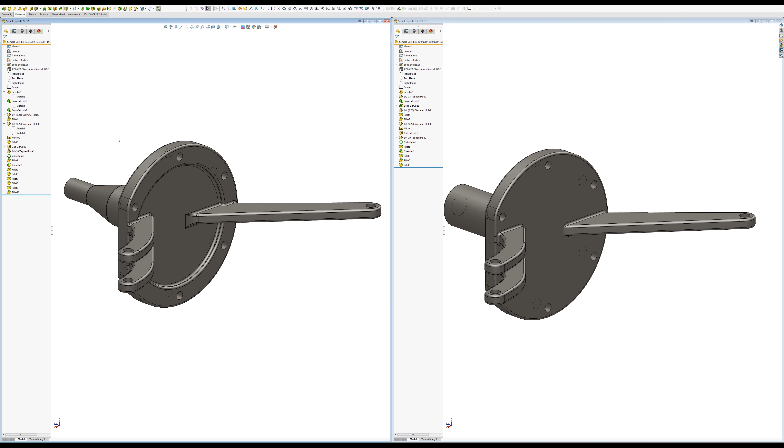So first we're going to look at the part on the left, and you'll notice that the main component of the part is a revolve, and the difference between the two revolves as far as the parts go is that you'll notice that the part on the right does not have this step in it here, and that is the feature that I used to generate the hole.

Now we could go to the part on the right and we could place just a counter bore in it right here. That probably would not be a problem. That would be a very valid way of doing it.

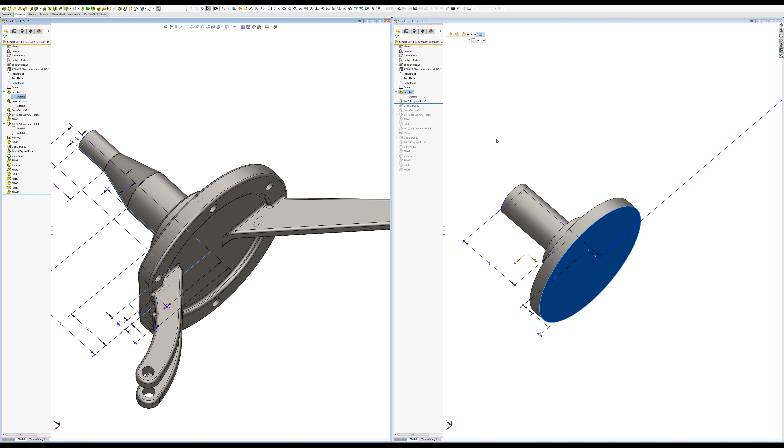I just wanted to be able to control the bore in the initial sketch, the initial revolve, instead of adding another feature. And so if you're a first-time user, you're able to roll the tree back and forth to insert sketches and features in a certain location. But I'm assuming that most of the people watching this video already know how to do that.

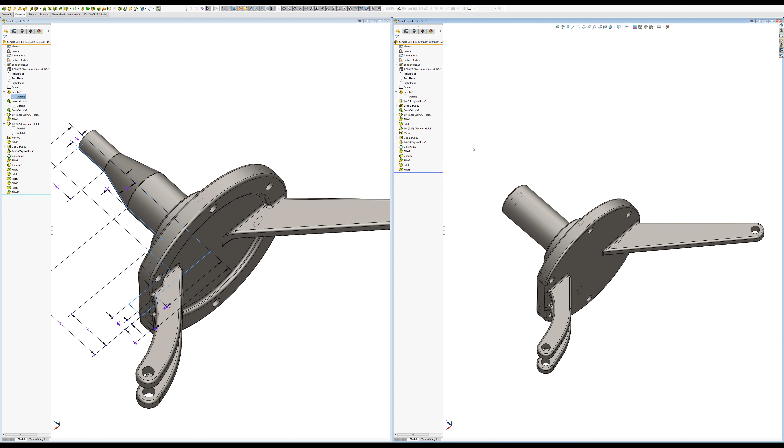We'll go ahead and we'll work towards this part from this part on the right here. We'll work towards the part on the left.

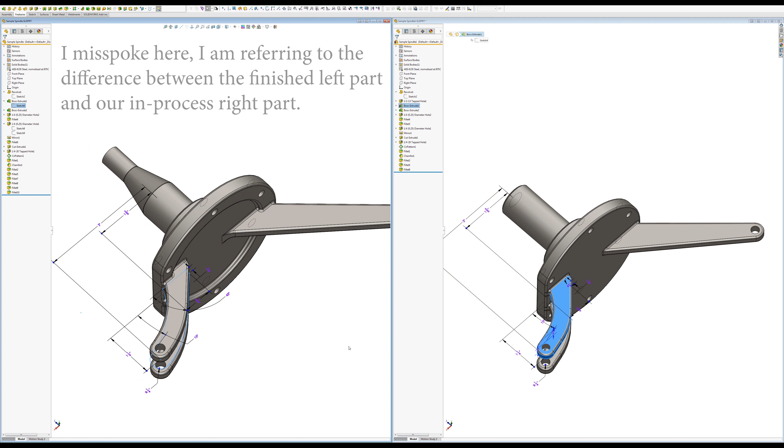So if we look at the boss extrude, you'll notice that the tapped hole is gone on the finished part, or the part we want to go to on the left. If we look at boss extrude 1, they are the same as far as where they're dimensioned from. Nothing's changed. What you would see on the left part from the right part that will make a difference is...

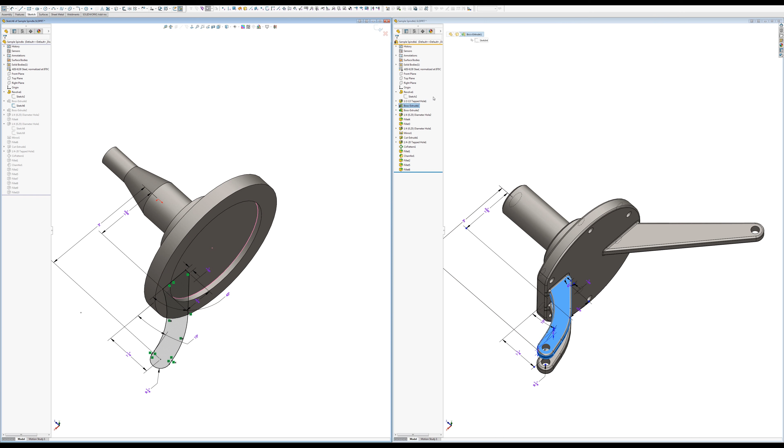If we open it up, this line here is constrained to that inner ring, whereas on this part over here, and this was the original part that we went from, this is constrained to the outer ring.

And so it does change the shape, and so we can talk about design intent. The design intent here is to keep the location from the zero, from the origin to the pivot point the same. And we also have a constraint here of 1 5/8 from the origin to where it comes into the main component. We have a degree constraint here and here both.

And so what we end up doing is we end up flattening this arm out slightly. So if you wanted to keep them the same, you'd have to do something slightly different. You'd have to change, you'd have to extend it, and you'd have to delete some parts.

Let's see, what would you end up doing? This 3/4 inch would no longer be the same because this arc would be extending down. So essentially what we wanted to do was keep the point here where it's going to pivot the same, and we've got constraints that we don't want to violate in this sketch.

Now you may have changed this to 1/4 inch from 1/8. You know, you may have your own set of rules as to what you can and cannot modify in the sketch, but the most important point was this pivot point from XY0. Well, actually, in this case, it would be XZ0, but yeah, it's the origin.

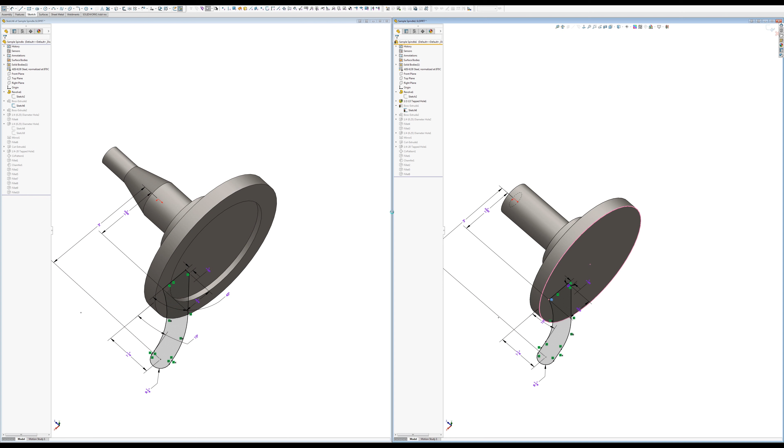So the sketches haven't changed, other than the attachment point, and we'll get to that in a second. And so we're going to get out of these two sketches, and we're going to get out of this one.

And then you'll notice from there's the boss extrude here, same setup where originally it was attaching - if I go to sketch 10 over here, it was attaching on this face, and now it is attaching down inside on the left, down inside the face. So it's going to change this shape a little bit. We're not going to alter where this hole is at, where the pivot point is. That's referenced to the origin.

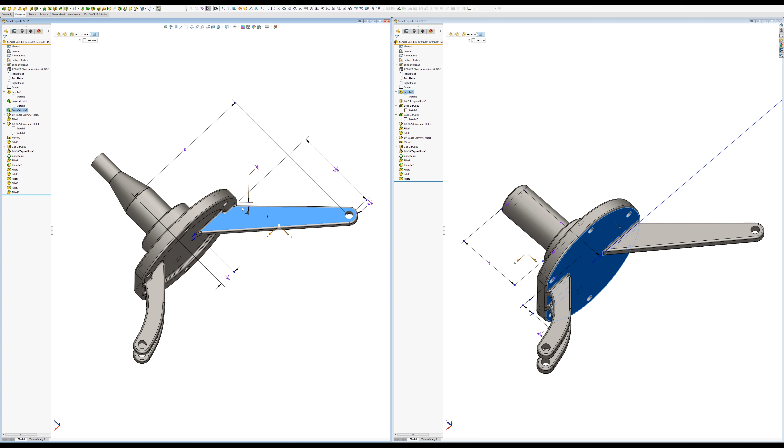And one of the other things we're going to keep is this clearance right here. This 1/8 inch buffer is referenced off the corner, and it just keeps us from flowing out into this edge here.

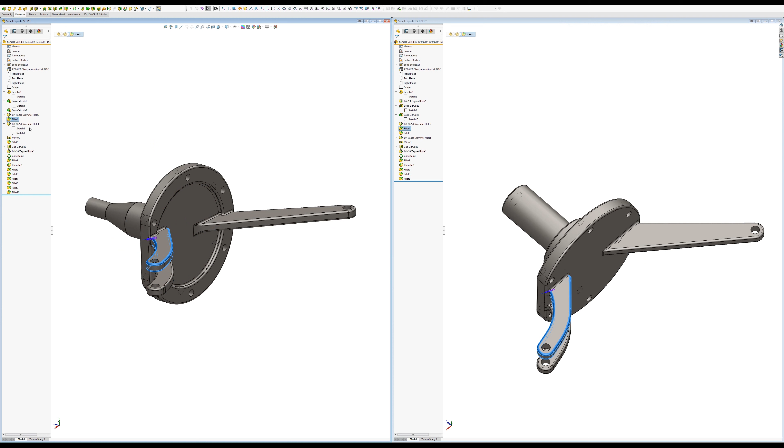Then we'll get to fillet 4, which is the same type of filleting. I did that before the mirror, so I could just mirror the filleting over. Again, that's your choice, you could fillet it after the mirror. I did it beforehand. The 1/4 inch holes are the same on these two parts.

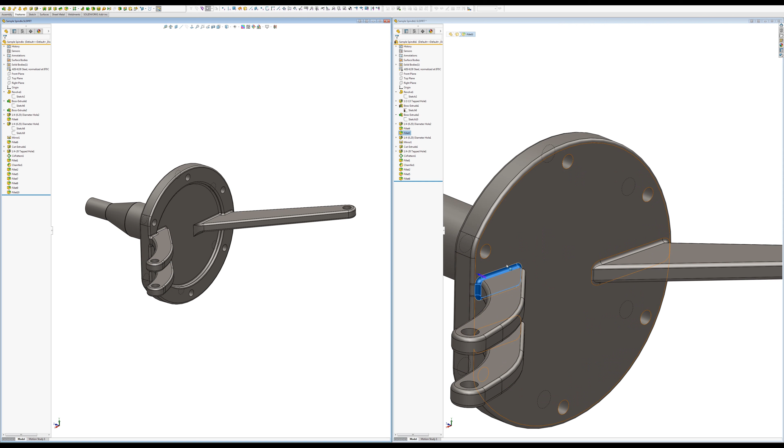Our mirror feature is nearly identical. What we do have here is a fillet 3, so let's discuss that. On this part, fillet 3 runs around the base of that arm, and we eliminated that on the component on the left because it was difficult to get the fillets to flow around the arms correctly with the new features that were added, and we'll go through that. You guys will get to see it during the working process.

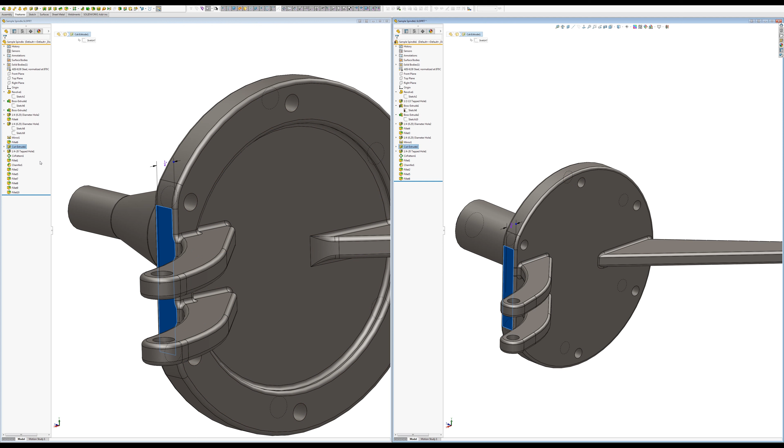The cut extrude is the same, nothing different about that, same distance. The tapped holes are the same. The circular pattern's the same, so we won't touch on those. Fillet 1 is the same, that's not going to change. That's the big fillet here on the front.

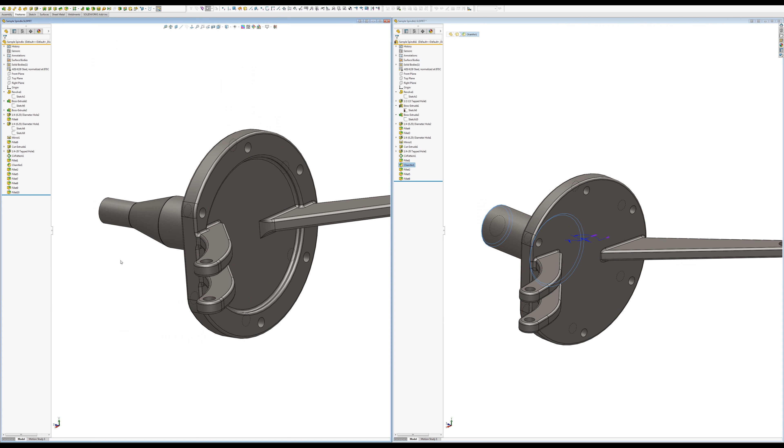The chamfer is slightly different in that the chamfer on the left part is only this front face, where the chamfer on the right part is the two edges. So on the left it's just one edge, on the right it's two edges.

Then we get into some filleting. Fillet 2 is the same thing on both. And then we will go to fillet 5.

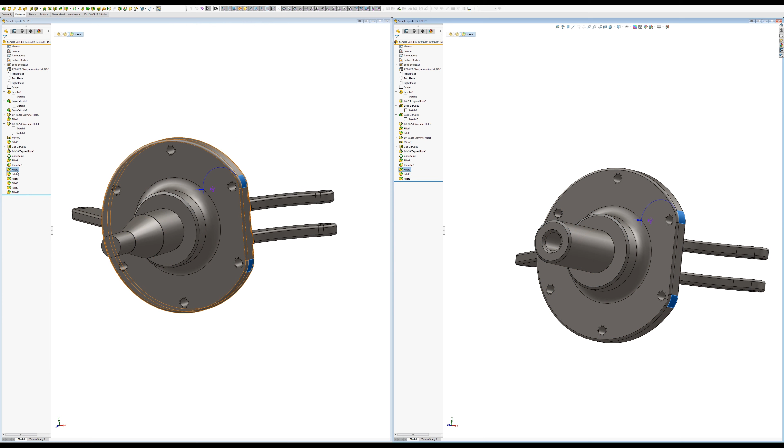You'll see that fillet 5 flows out differently on the two parts. You can see on one part, it's a fairly even fillet around the component. If I was actually doing this part, I would trim this in a way where I would actually clean that up, because a mill would have a hard time doing that. You'd end up with this blemish right there.

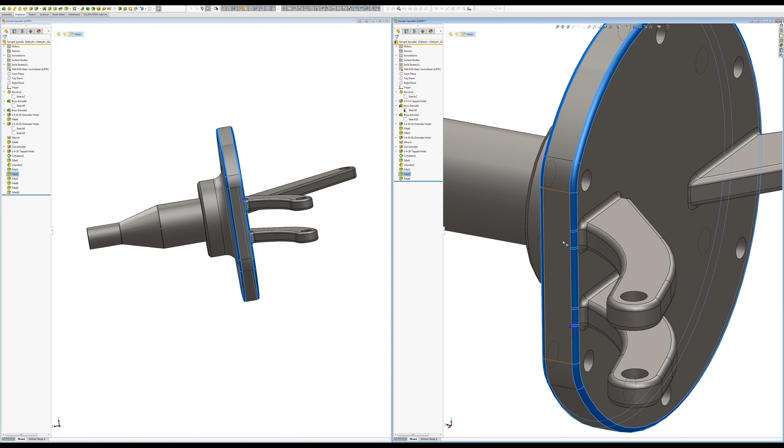We're not going to get into the manufacturing, this is just modifying the parts. We're not going to talk about the manufacturing, but you can see over here on the left part it flows pretty badly. It did affect the filleting because the shape of the arm changed as it was brought into this face here.

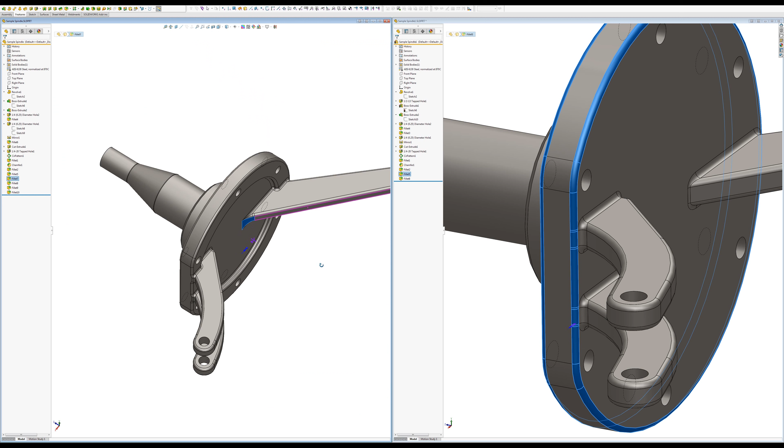So then we've got fillet 7 here, which is this big fillet on this arm. We added a fillet to relieve some of the stress, maybe at that high load point there. And you can see over here that we did not do that on the arm. Let me get this zoomed out a little bit for you guys.

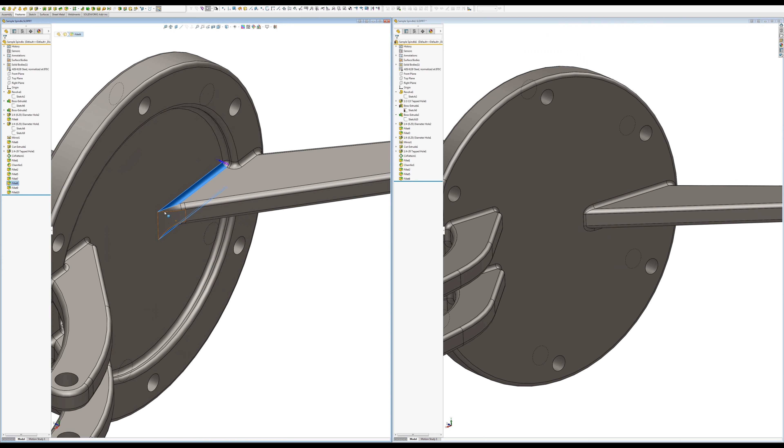So fillet 8. The reason that we did this is, if I would have done it differently, let me see if I can show you guys what happens. We'll get there. Fillet 8 is done just for those two faces. Fillet 9 wraps the rest of the arm. You can see over here that fillet 8 did the whole thing, so we used fillet 8 to flow those fillets around the entire arm.

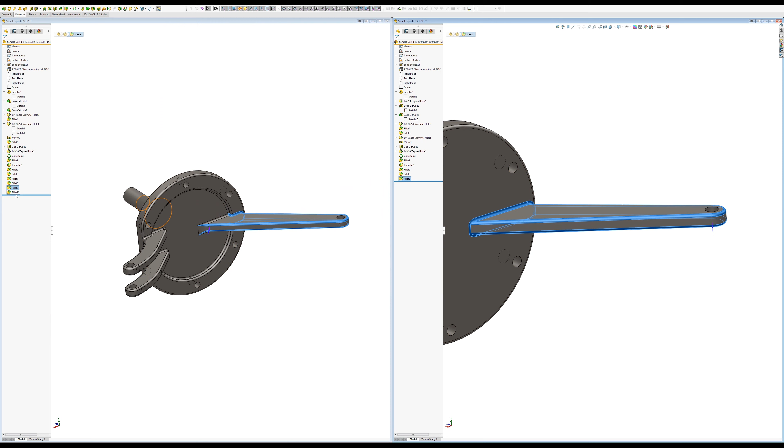And then fillet 10 over here was just to break the sharp edges on the taper and down at the front of the nose cone. So we'll break that edge with like a 0.025 inch. Did that do that, or did it just accept it? No, alright. Might even do smaller than that.

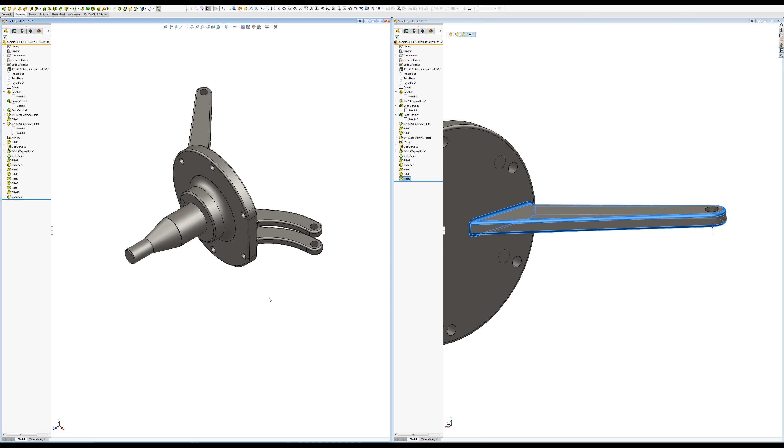So we're going to get into the parts here. What I'm going to do is roll this back to the start of the part, and we're going to go ahead and fix the revolve the way we want it to look. Now, you wouldn't be able to look at your finished part.

In my case, I'm able to look at it. Pretend it's not on the left, so that you would know kind of what you were doing. I know, having done this ahead of time, some of what happened when I was trying to get my fillets correct, and we'll try to go through that again.

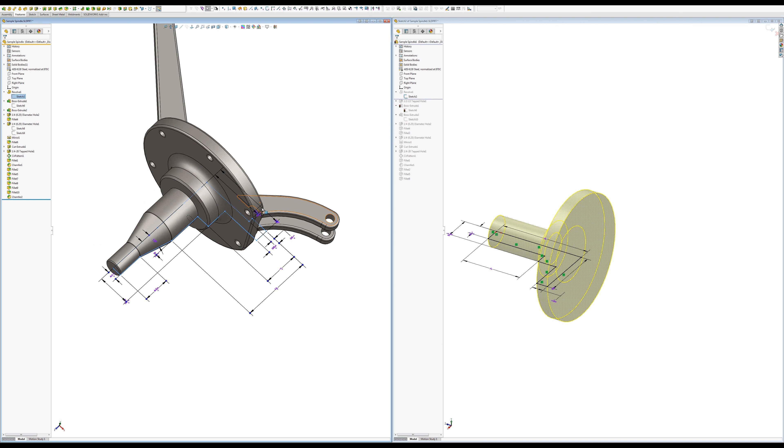So we'll go ahead and get this sketch fixed here. So we'll just add that.

You'll notice that, one of the things, let me go back real quick. Let me undo that. So I'll show you what happens if you dimension. A lot of guys don't realize, if I dimension this line and then trim out, when I trim, it's going to delete that dimension because it was to the end point of the line, point to point.

The reason that my sketch doesn't do that is because when I dimensioned it, if you watch, I dimensioned to the line itself. So when I do a dimension instead of point to point, if you pick the two lines that you're dimensioning, you can do trims, and it will still reference that if there's a piece of the line left. So that's important. We've got 1.5 inch radius by 1/8 inch deep, so we'll get the 1/8 inch.

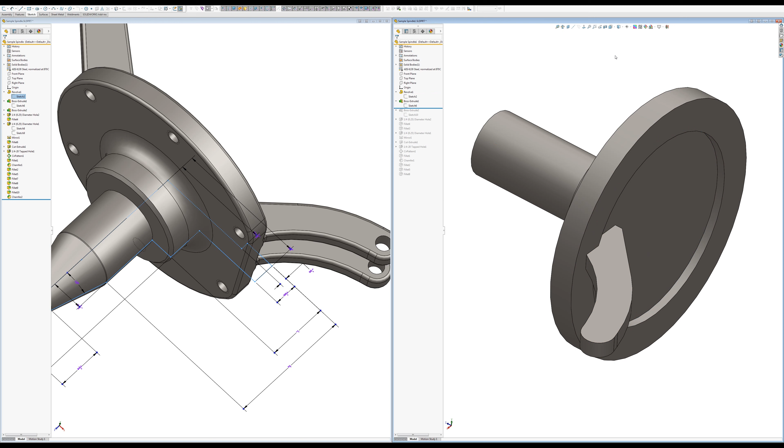We're going to go ahead and set these collinear. You'll see it changes the shape. We still retain all of our intentions with the sketch itself. And now it's down inside the part like it looks over here on the left. Let me roll it back so we can work through it together here.

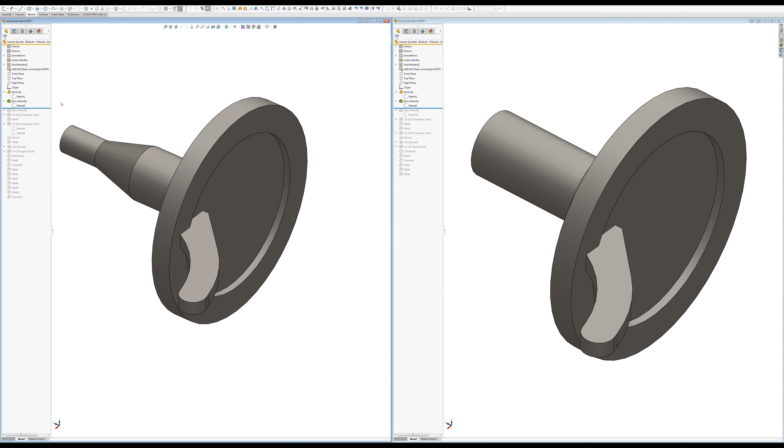If you ever get parts where you have to do this, it's very nice to be able to have the part you want to move it to, or take information off one part and use it on the other. I set them up side by side like this. You can also drag and drop—a whole bunch of stuff you can do.

On the revolve, I forgot to add that front piece, so we're going to go ahead and do that right now, and you'll see some things happen here. So we're just going to add a line here and here and there. Now you're going to notice that when I trim, I lose a dimension.

Because it's constrained to the line. So as soon as I trim out right here, right here—oh, actually I'm just going to lose this. So it's constrained to the line. Going to delete that, and then I'm going to set these two horizontal so they can't move.

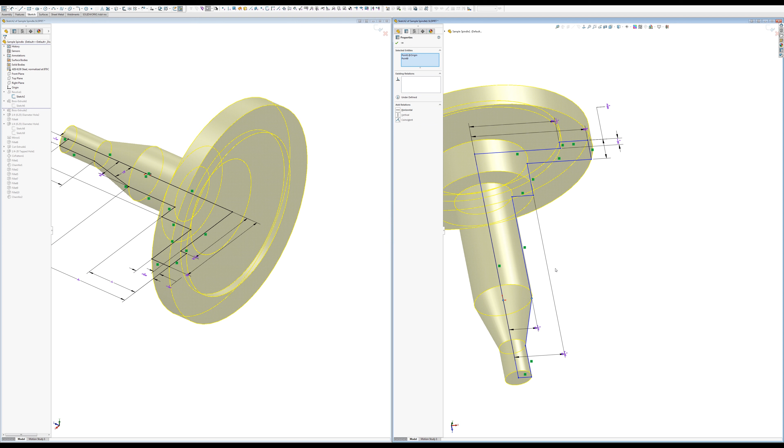Oh shoot. Yeah, I don't know why that moved. So I'm going to set these two horizontal. And then I'm going to go back and dimension from here to here. That's going to be 3.

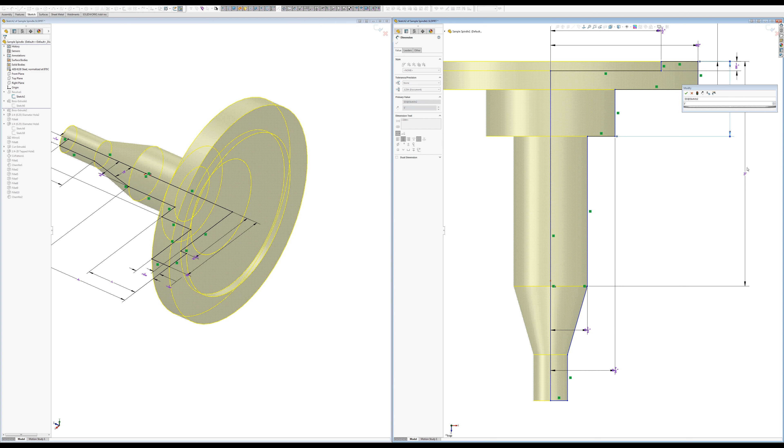And I'm going to change my dimensioning for the shoulder here because I want this distance to stay the same. This I changed to 2 on the other model. So we're going to do that, and it's going to bring the whole thing forward. It's going to keep all this stuff and just shorten this distance here. So we're going to do that.

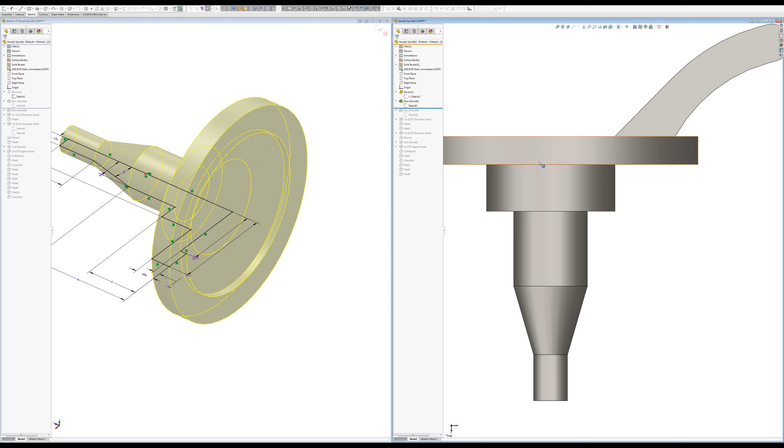And let's see, how are we on time? 16. Okay.

You'll notice that this sketch is on the right, or on the top plane, and I just used offset from sketch—offset, and that just allowed me to move that whole thing up. I offset it a quarter inch. That's something you guys can figure out on your own.

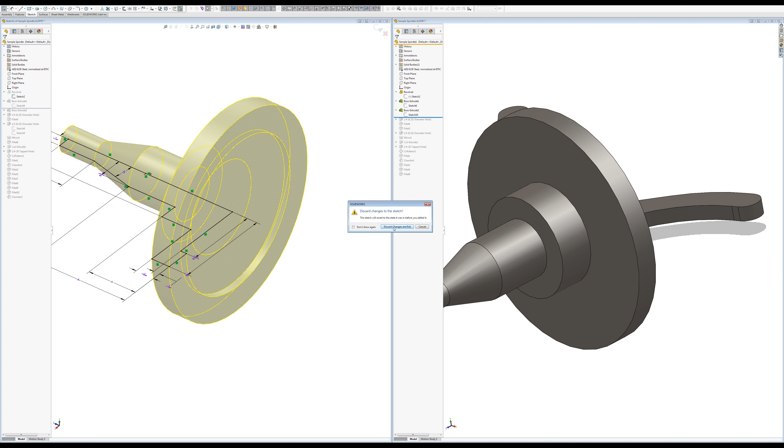So boss extrude 2 is the same. We're going to exit out of here, and we're going to roll down below boss extrude 2. We're going to get our first hole in, which is going to be over there. We're going to get a fillet in here.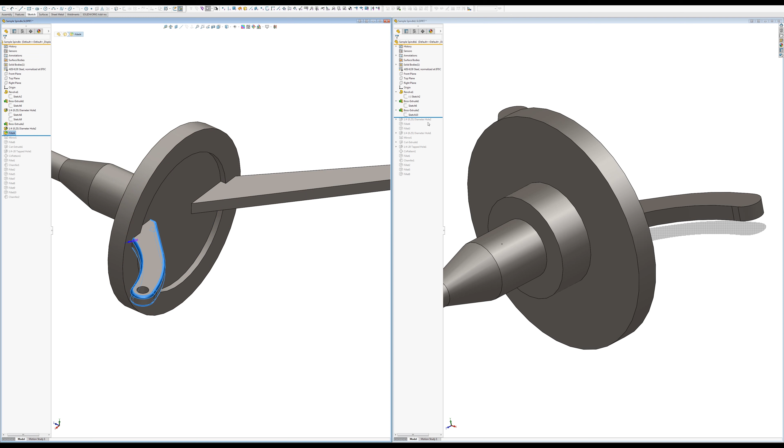So you'll notice fillet 4 does the same thing. I just rolled it around that arm. Fillet 4 here is the same thing, rolled around the arm.

So on the left we're going to leave that, and we're working on the right. So fillet 3 used to go around the bottom, now it's going to go around part of it. We're going to move this like we did on the left side—that was a bad habit on my part.

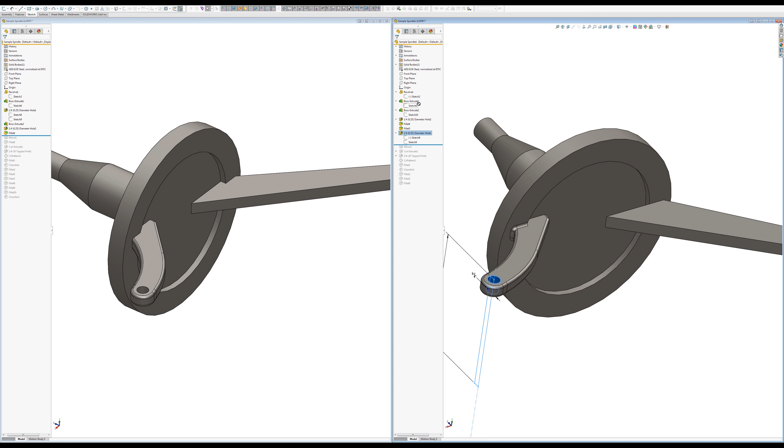We're going to get rid of that. We're going to OK it. We're going to move it up with the part that it goes with. We're going to reconstrain the sketch.

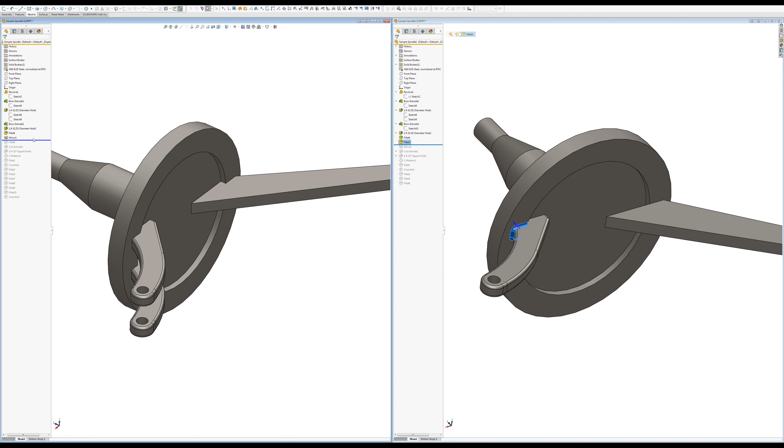And we're going to get back to where we were at. So fillet 3 is not going to work there, and the reason it's not will be evident here in a minute. So we'll roll down and get to where we need to be here. You'll notice cut extrude 1 hasn't changed.

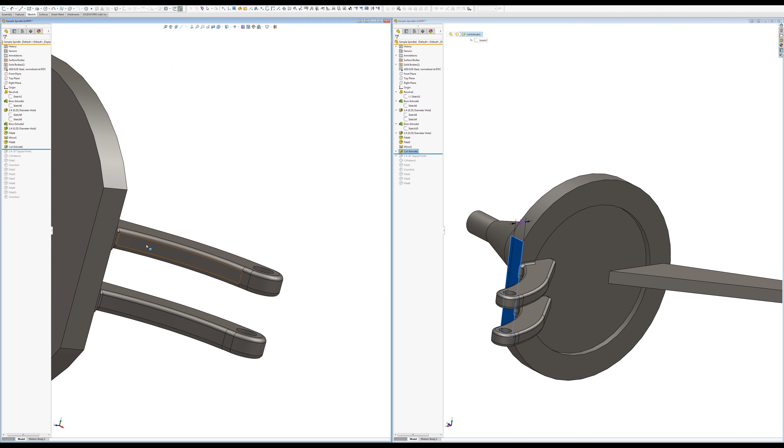What you'll see on the left part here is this fillet sticking out right here, and it shouldn't be doing that. Really what that should have done, that was a mistake on my part. That should go both directions, and this should go up to surface as well.

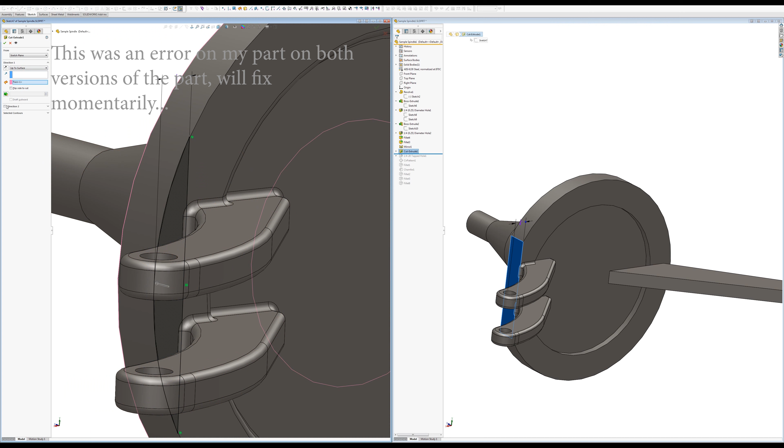Hopefully it'll pick that up, up to surface. It did, good. Okay, and so on this one over here, same problem.

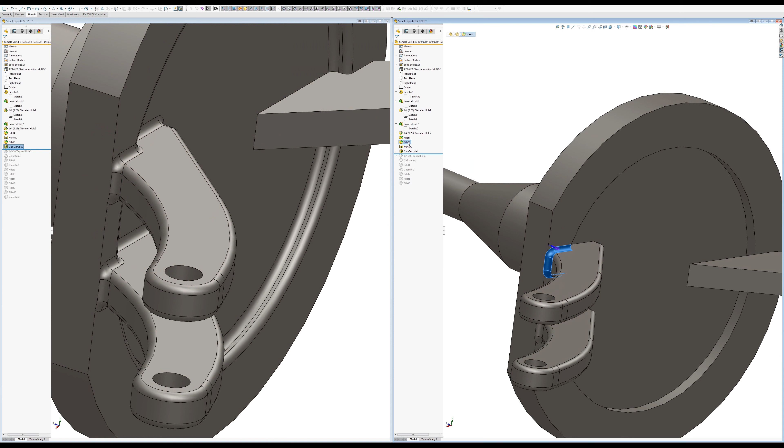We've got fillet 3, which is not doing what it should be doing. You'll notice over here, fillet 6, what I did is I rolled it around everything. So let's take care of this cut extrude first. Oh, we're going to get rid of fillet 3.

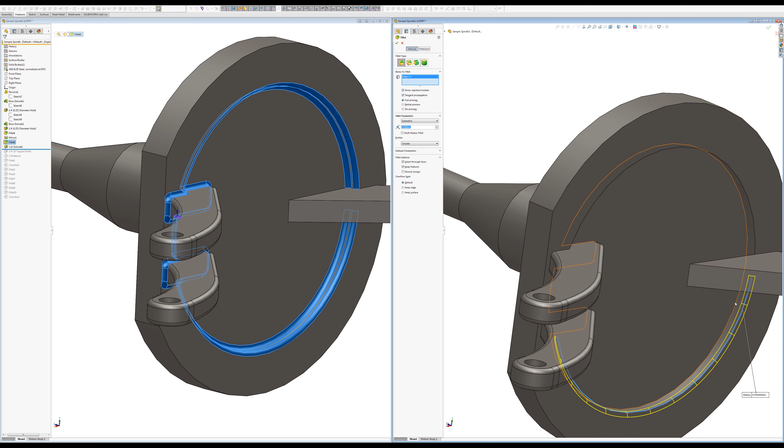And we're going to make a new fillet here, and that's going to be fillet 6. In this case, I'm not sure, it doesn't say what the number is. So we're going to fillet these. We're going to make sure and get these components here.

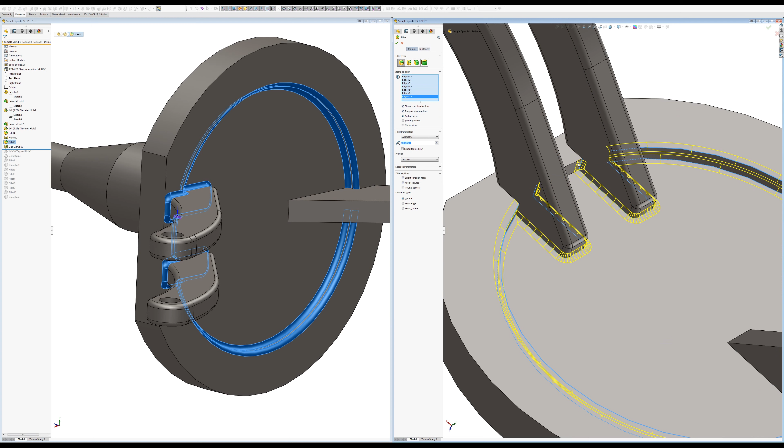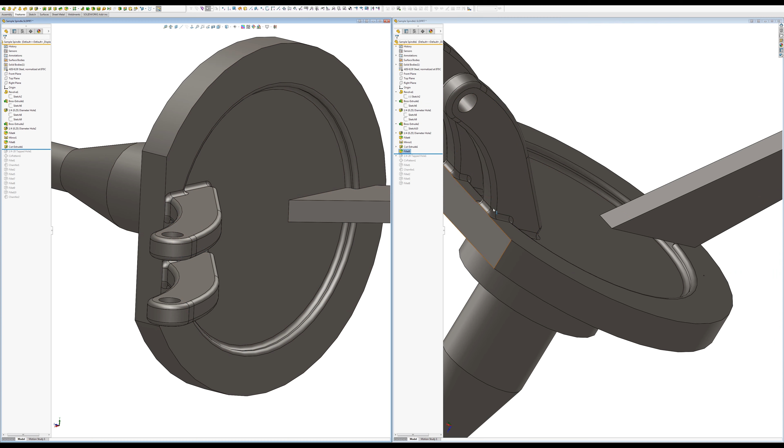And you can see now it rolls around the whole part. And I want to keep surface. How's that going to work? Did it fill the same? Did it flow the same way? I believe it did.

So we're going to go ahead and move fillet 6 before this cut extrude. In this case, it just makes it the same. And we're going to do this cut extrude, and we're going to make sure that it goes up to surface, and direction 2 is going to be up to surface as well.

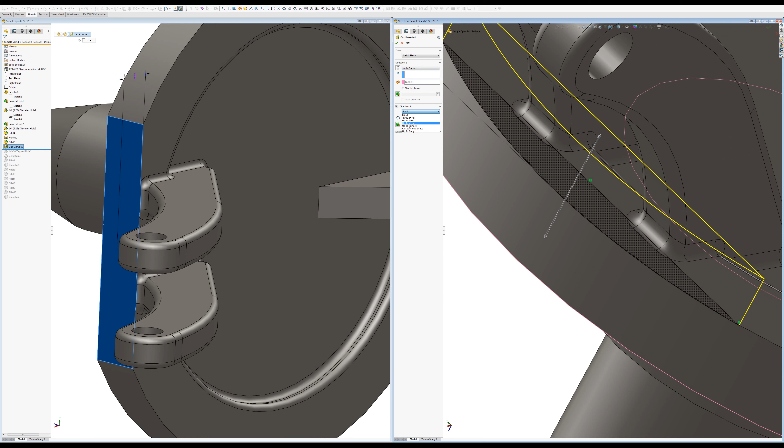That one. Okay. And then we've got our tapped holes and our circular pattern. Nothing's really changed there. Now, what we're starting to get into here is how, oh, I forgot to fix this one as well. Darn it, guys. Let me fix that.

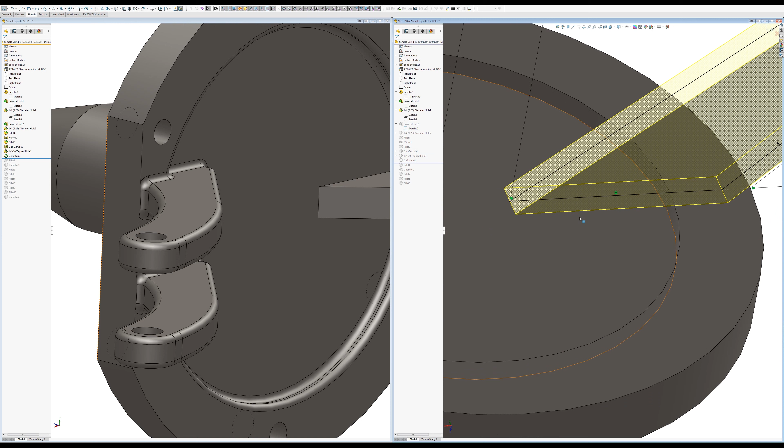So sketch 10, we're just going to edit the sketch. We're going to get rid of this. And again, we want this to stay a half inch from the center. We want an eighth inch clearance, and we've got a location out here. So we're going to now stick this down to this face, and it changes the shape but keeps our design intent.

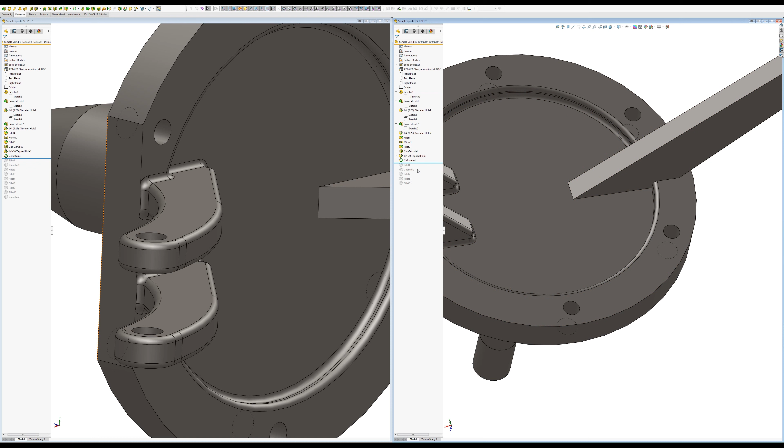And so then we got fillet 1, which is out here on the nose. We've got some chamfering. This chamfer may now error out. Should. So what's happened here is it's missing this edge right here that was chamfered.

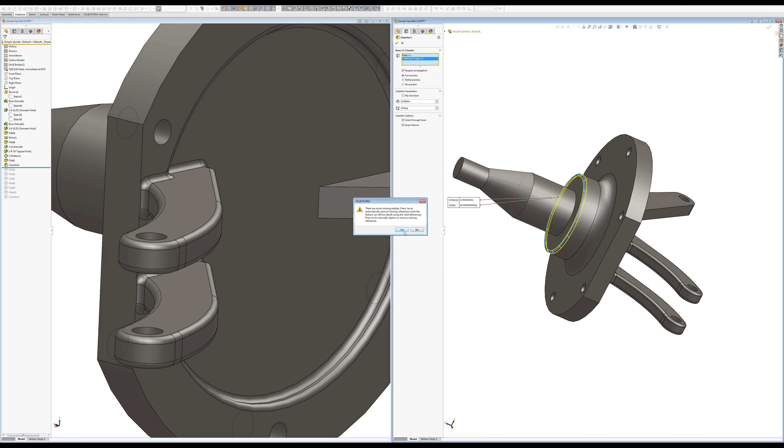So we're going to open it, and we're just going to close it if we can get it out of the way there with the text. It's going to give us a warning telling us it's going to remove an item. Fillet 2. So fillet 2, same thing on both sides.

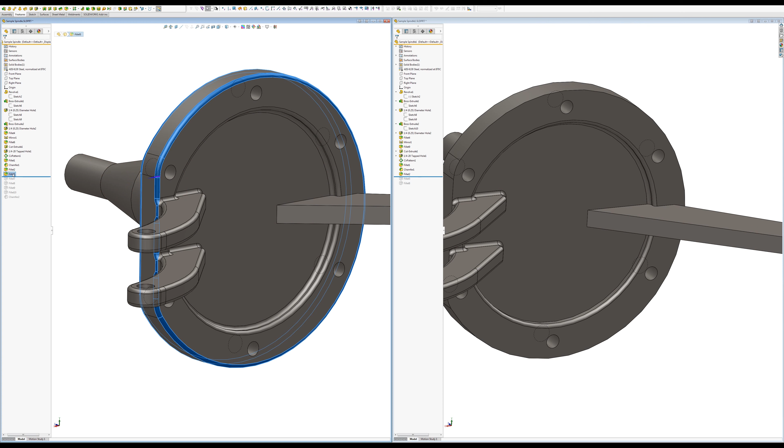Fillet 2 doesn't change. And now we're going to get into the change for the part. And the change here, fillet 5, you'll see on the left. Fillet 5 is the fillet around the outside edge.

It's not a different pick, it just flowed differently from the original part. So now you can see they're identical. Flows across here, does this funny gapping. All right, so we're going to move on here.

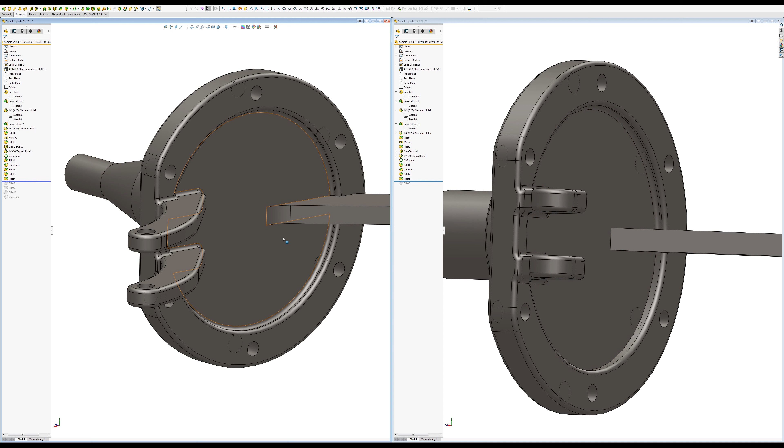So on this side, you'll see fillet 7, which is the large nose fillet there. It is half inch. So we'll go ahead and get that inserted on the right-hand side, and we're going to change that to 0.5. And we'll get these in a similar orientation here.

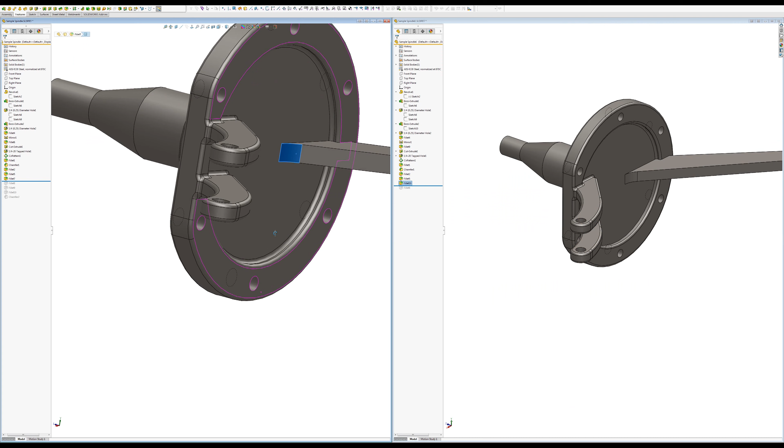And then we're going to take a look at fillet 8. Now here was the thing I was explaining. So I'm going to go over here and show you why I did it this way. If I just start a fillet and I've got tangent propagation on.

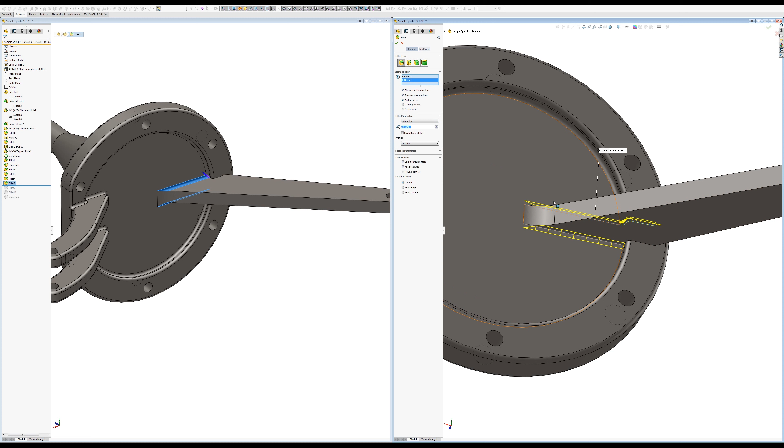What you're going to notice is what it's going to attempt to do is roll around that part, and I'll show you what I mean by that. So tangent, oh, you know what, I missed, one sec guys, I missed something here. Let's see.

9 is 6 over there. I missed this edge, you guys probably saw that. Alright, let's try that again.

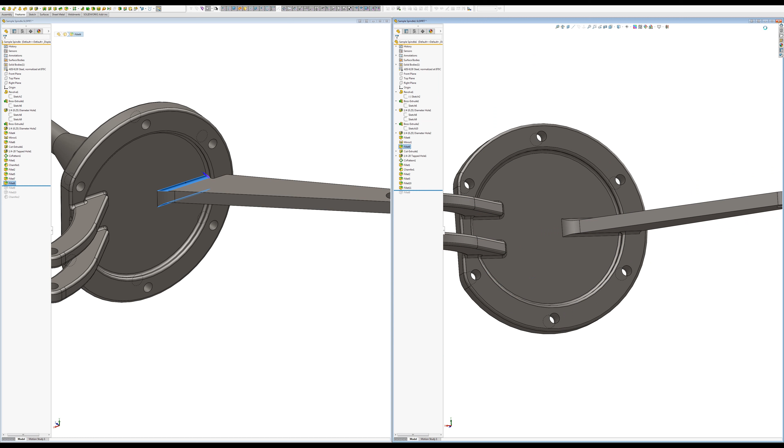Okay, back to this fillet. So in this case, fillet 11 is fillet 8 over there, but I'm going to show you what I started out doing. I had tried to fillet this whole thing, and what you'll notice is how those pull the toes in. So on a milling machine, in order to do that, it's gonna have to mill around that corner. I didn't want to get into machining, but this is not normally how you'd want to run those side fillets out. You wouldn't want them to curve in.

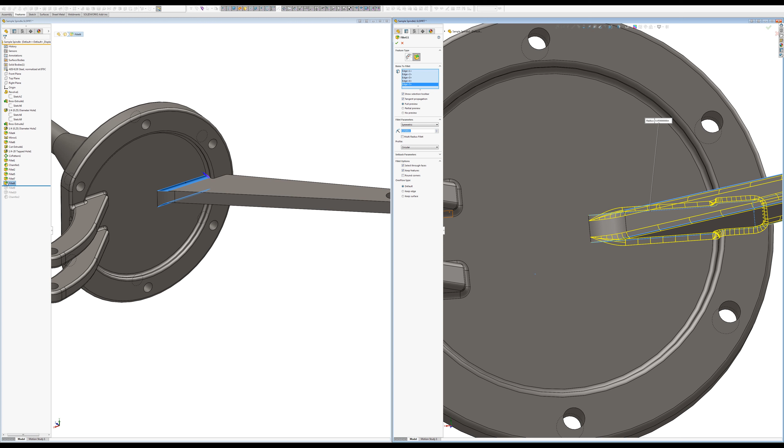So if I come over here and take a look at this one, you'll see... oops, because I've got it open in the same window, it won't let me modify both at the same time. You'll see over here that I turned off tangent propagation. I wanted these, just like you had a ball end mill coming along here, to just feather straight out.

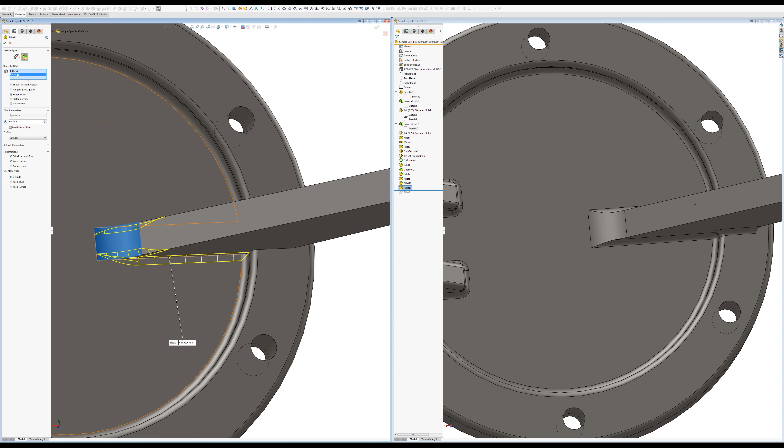And you'd have to do this cut afterwards. Don't want that, dang it, let's get rid of that. Cancel. Anyways, to go back to what I was saying, you'd want the ball end mill to come straight off, and then you'd have to machine this part afterwards. This part would be extremely expensive to machine. You wouldn't have it machined unless it was worth a whole bunch of money, because it would be really expensive to machine. But that's neither here nor there.

So the reason I didn't select all the faces over here that I had originally intended to is because I don't want those pulling in like they were. So I'm going to turn off tangent propagation, and we're going to get just the fillets we've got over there on 8. In this case it's 11 over here. Actually, fillet 8 was right here. We'll just clear all the selections.

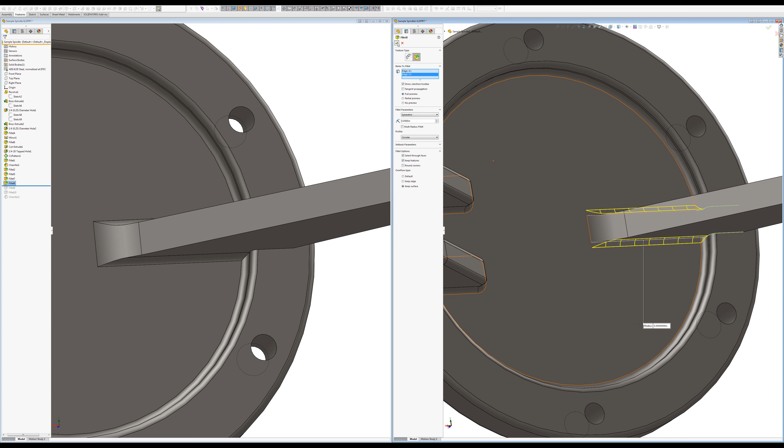We'll select these two. That way we can keep the numbers the same for you guys, or somewhat the same. We're going to turn off tangent propagation, and we'll go from there. So now fillet 9 basically flows around the rest of the part.

So if we take a look at that, I've got some selections there. Pull this down a little bit. We've got 3. So we're going to add a fillet over here. We're going to close that out because I've got them both running in the same instance of Solidworks, which I normally wouldn't do. So over here we're going to... oops, forgot to make this active.

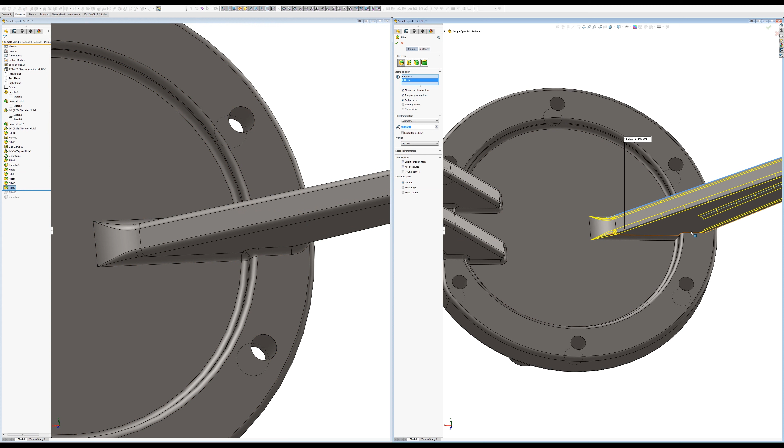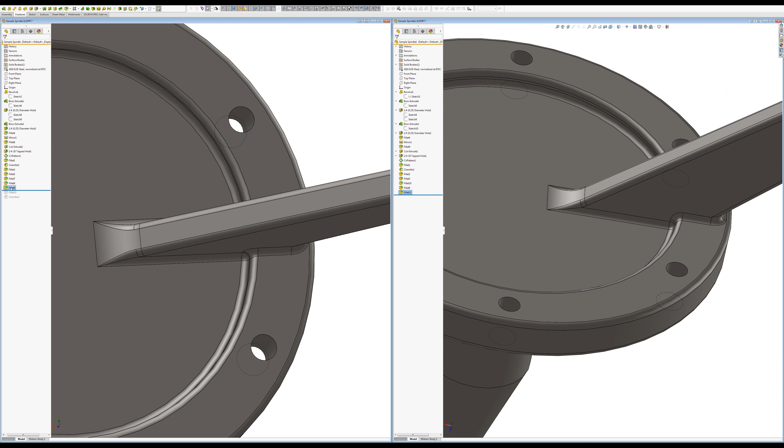We're going to go ahead and get this fillet rolling around this whole thing. And I should just be able to select that. Nope, not that. That. Yes. And are we done? Nope. Yep. Okay, so fillet 9 and 12 are the same, even though my numbers aren't the same.

Fillet 10 is going to be the nose piece. So we'll do that real quick for the sake of being thorough. And I can't remember what I set this to. I think 0.05. And then we're going to chamfer that last part at 0.25, 0.025.

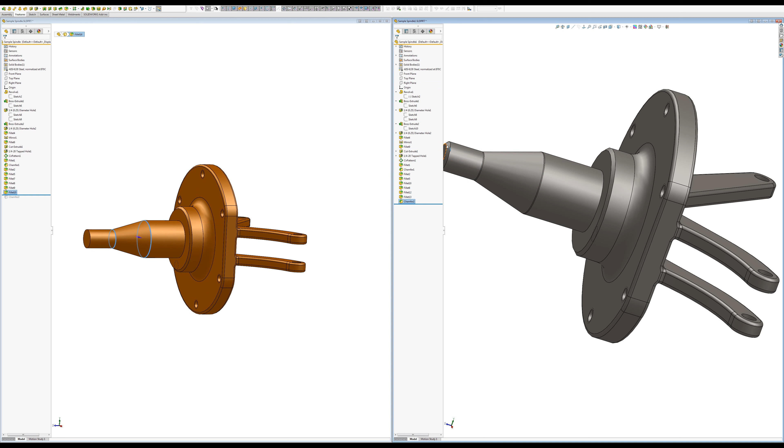It does that all the time. Inconsistency in the way that the damn tool works. So when you're in a fillet command, it automatically has that area highlighted. When you're in the chamfer command, it doesn't. So, inconsistency in the way it works.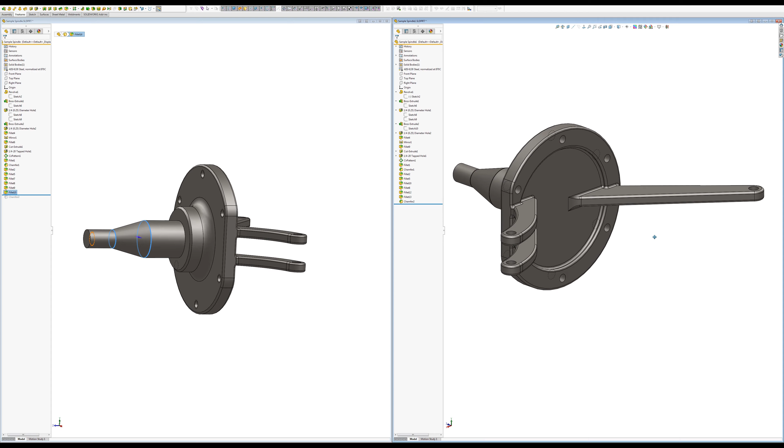And I normally don't have this on, but I wanted them to be in the same orientation for you guys. So we're going to get them in the same orientation real quick. And let's see, right there, and then one up, and then zoomed in. Alright, and you guys can see how the parts match.

We're going to use this for future modifications. I'm going to do a video on how to reorder parts, or reorder features, how to untuck things that are stuck below something, how to unstick them. And then we're going to look, the third video after that, after we do some editing where we've got to move things around that are really hard to move around, or harder.

We're going to look at this part from the perspective of having it made. I'm assuming this would be at least 3-axis. I'm not sure if it would make sense to do it 4th axis or not on this, but it would be very expensive to have machined. It would be much cheaper to have a turned part that's drilled, turned, and welded. So those back arms could be welded, and you could get essentially the same part for a lot less.

So we'll go back through that. We'll talk about that workflow, how to go from a machine part, and then your boss comes up and says, hey, we need to turn this into something that's a welded component or a weldment. And that'll be the third video. So hope this helps somebody. Talk to you guys later.